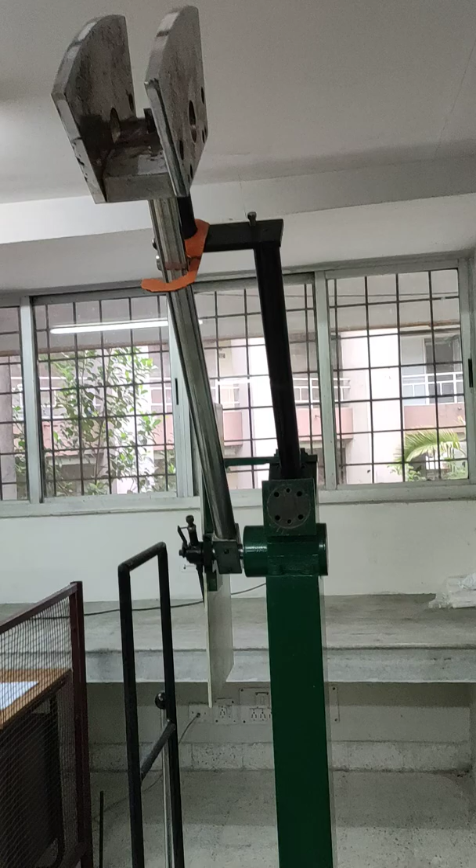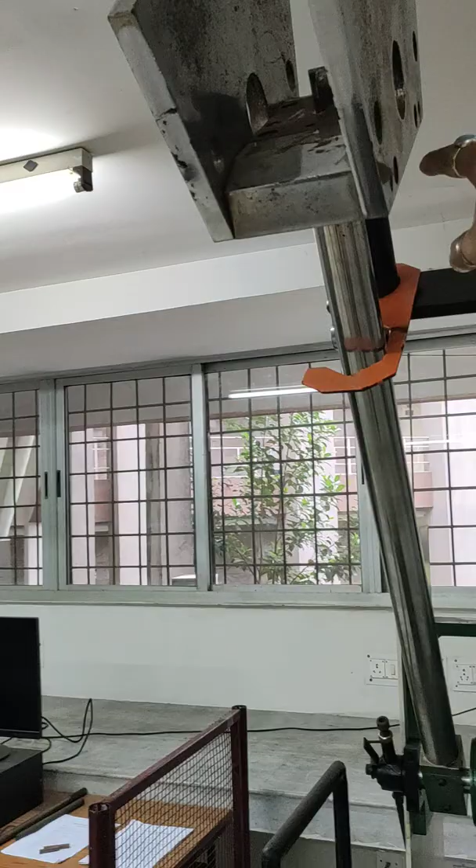So I put this hammer in the topmost position by lifting it, and once I put it here, it will automatically keep fixed, and this is the safety handle. Now the hammer is in the topmost position, and this machine is ready for conducting the Charpy impact test.

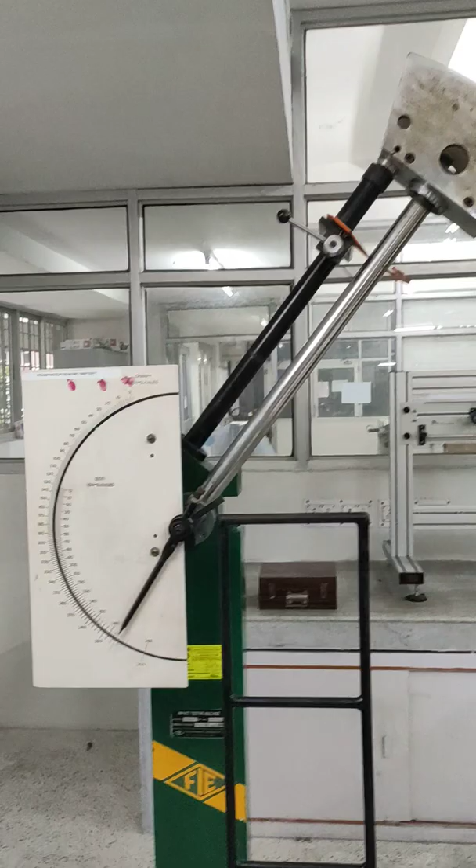So how to perform the Charpy impact test? This is the first step. Second step, we will put the specimen.

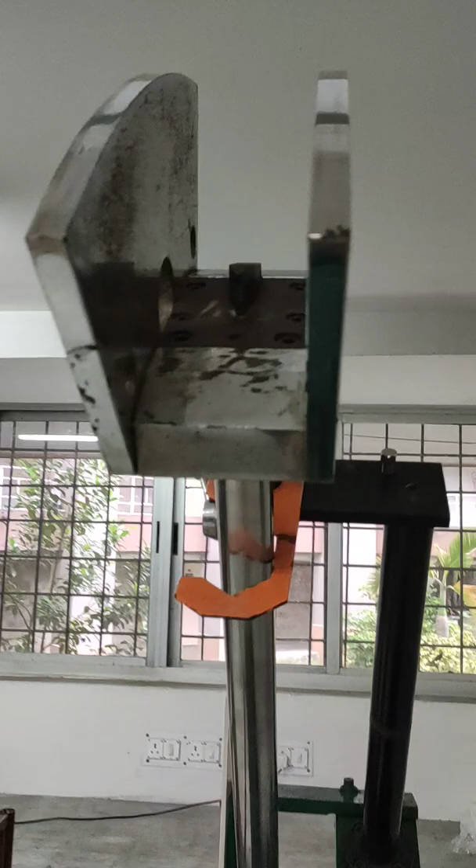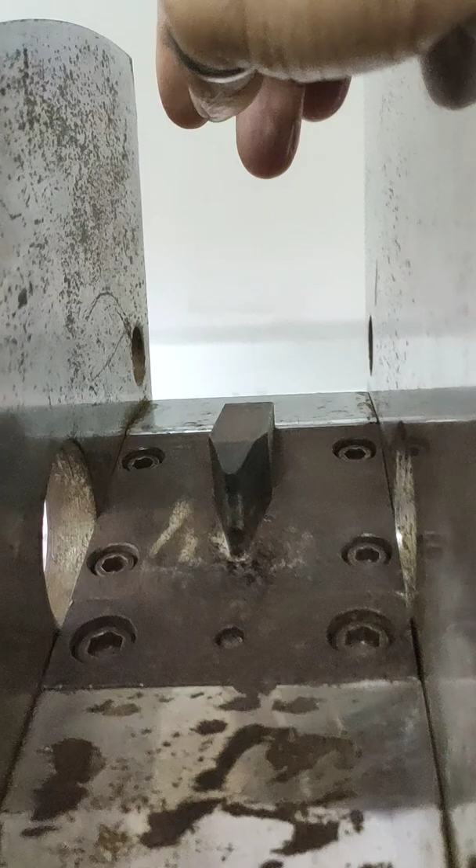Before putting the specimen, you need to see some other things. This is called the striker. It is tapered, and this is the pointed striker, tapered on both sides. The striker can be taken out. For the Charpy impact test, this is the striker used. For the IZOD impact test, the striker will be different, which we will also show you. So in this hammer, this striker is attached.

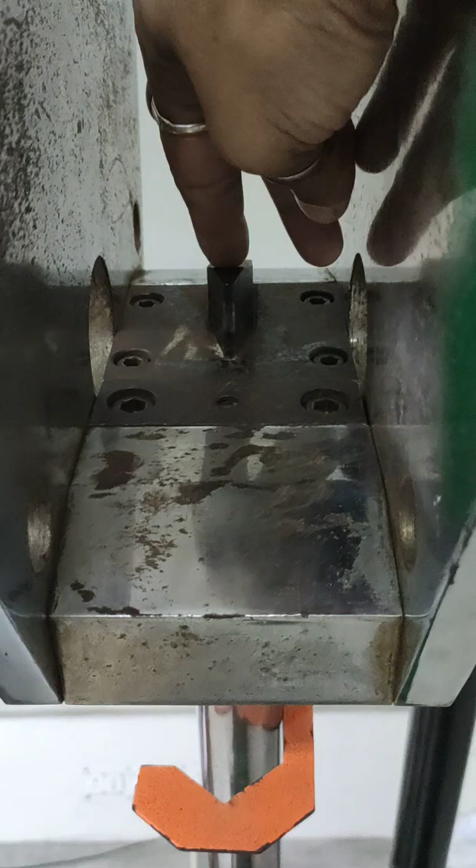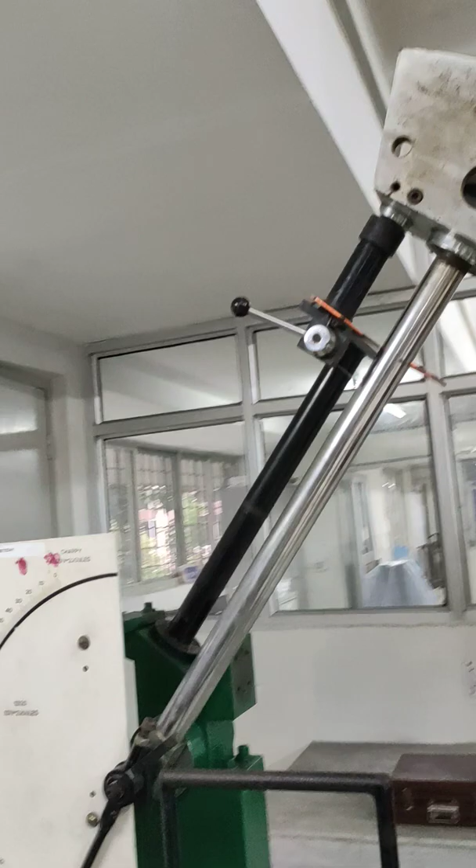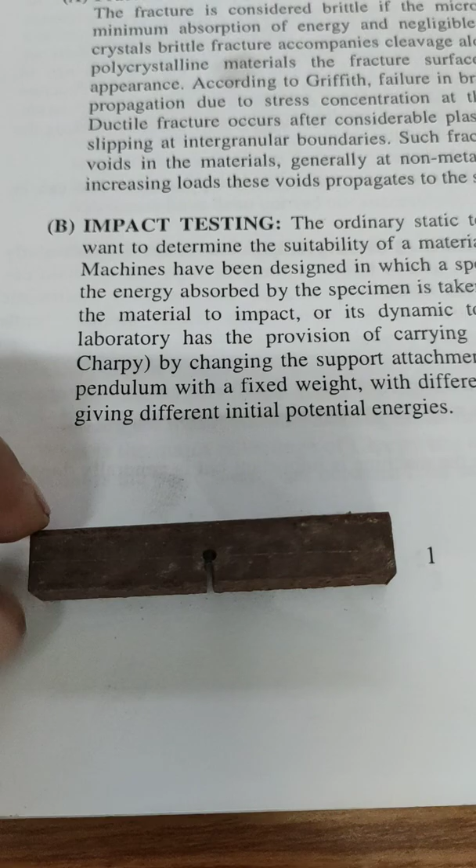Now we can go for fixing the specimen. For fixing the specimen, you need to go to the bottommost position of the setup. So this is your specimen. Just check it once. This is the specimen you have seen. There is some rusting because these specimens were kept since last year.

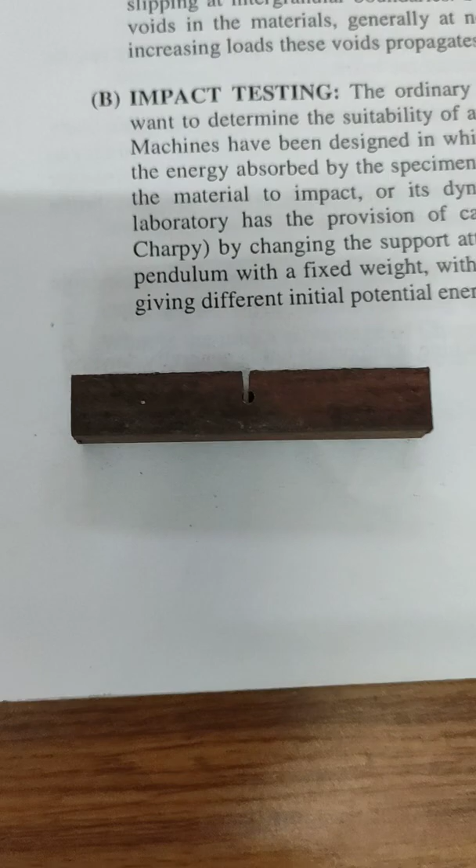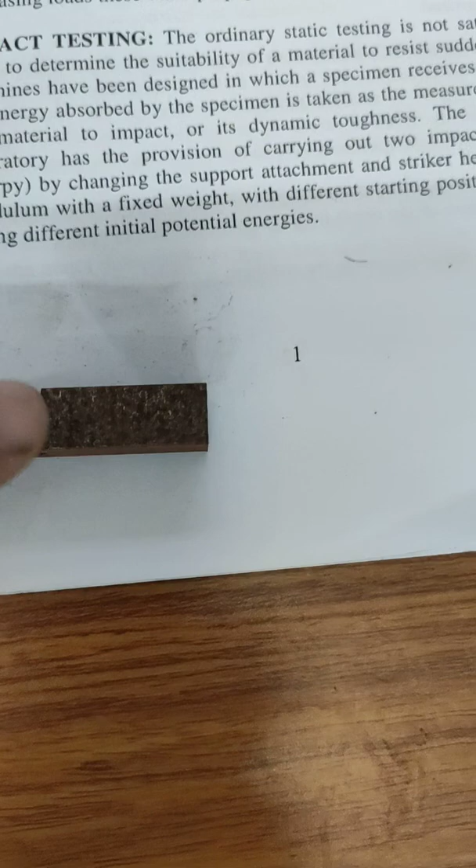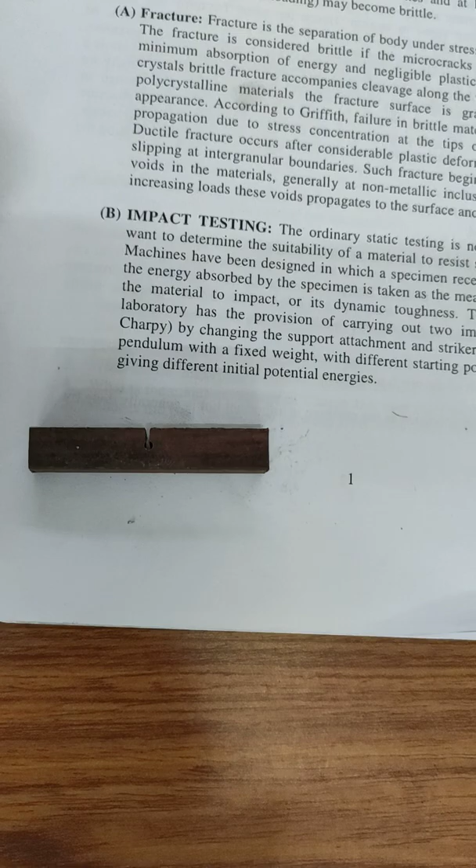So here you have seen, in this specimen, one notch is there, in the center. This is the notch, called the U-shaped notch, or U notch. In both Charpy and IZOD impact tests, there will be a notch on each specimen.

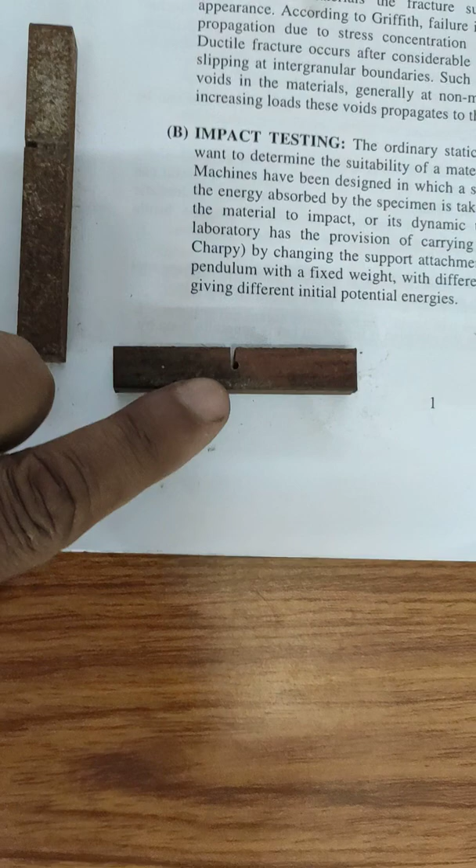For the IZOD specimen, this is the notch. For the Charpy specimen, this is the notch. The notch can be either a U notch or a V notch.

So the notch geometry, where to put the notch, and the specimen geometry are all shown here. This is the specimen geometry.

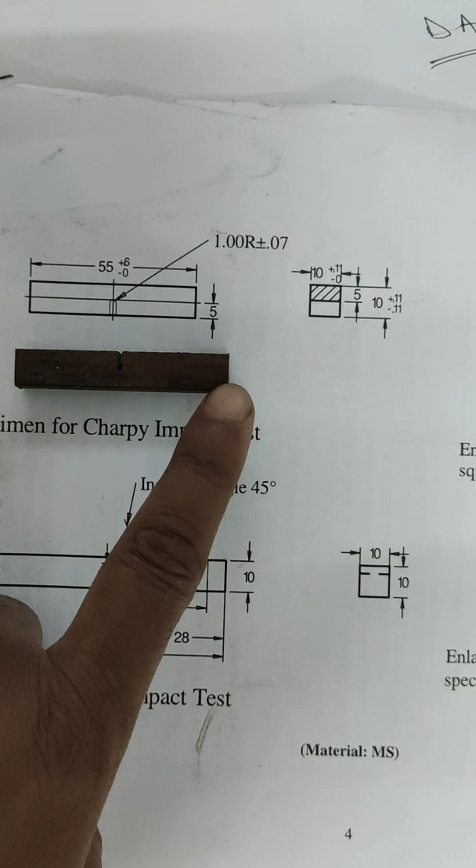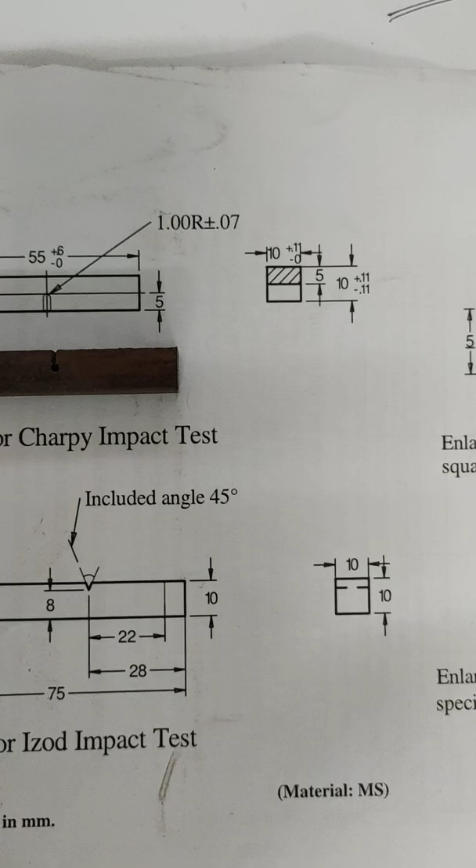For the Charpy specimen, the length is 55 plus or minus 0.6 mm, and the notch geometry has a 1 mm root radius plus or minus 0.07 mm. This notch should be made using a milling cutting machine. The width and thickness of this specimen is 10 mm by 10 mm, with a length of 55 mm, and the notch geometry is as shown.

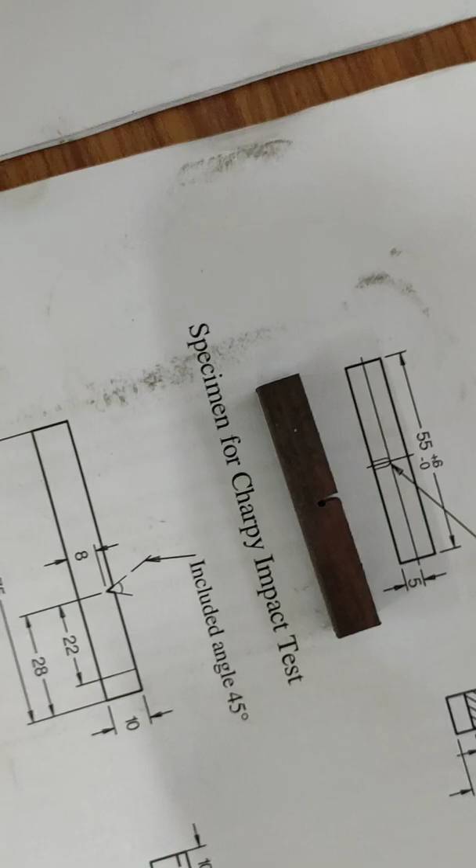This is the notch geometry, clearly mentioned here. This is for the IZOD specimen. This is the specimen, and this shows the specimen dimension details and notch geometry.

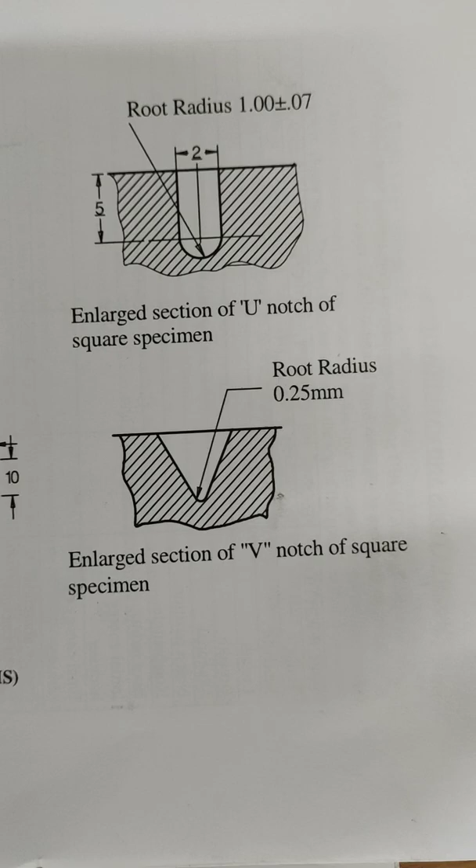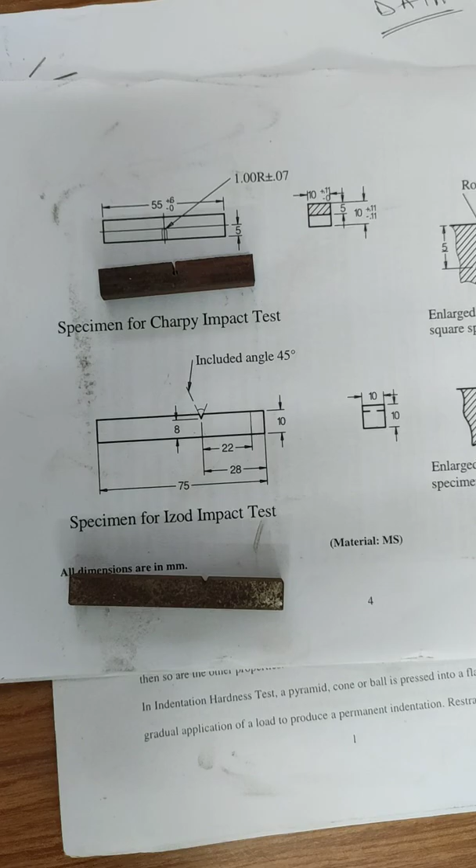The angle is 45 degrees. This is the geometry. The root radius for IZOD is 0.25 mm, and for Charpy it is 1 plus or minus 0.07 mm. Everything will be given to you as a soft copy as well as in video, and we will provide a manual copy so you can easily understand.

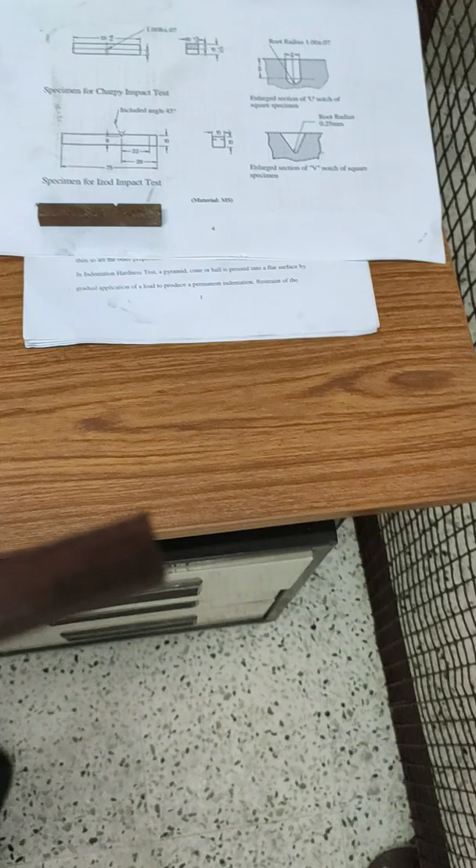Now we will put this specimen on our impact testing machine for the Charpy impact test. First, we will perform the Charpy impact test, as the machine is ready for it.

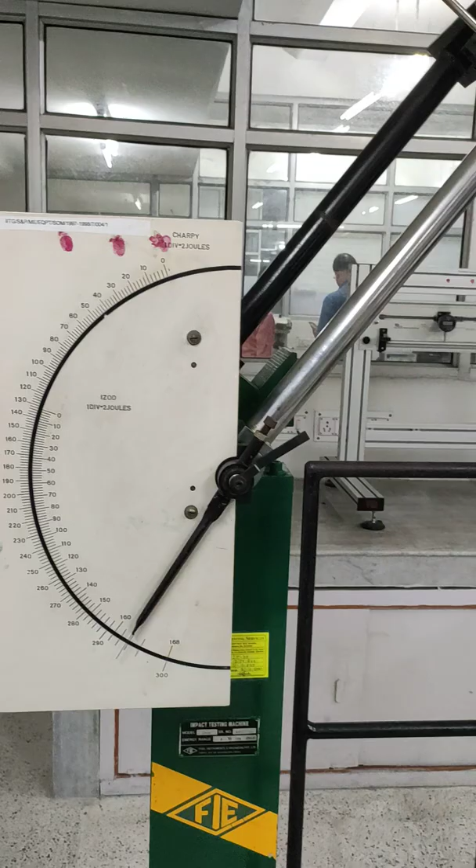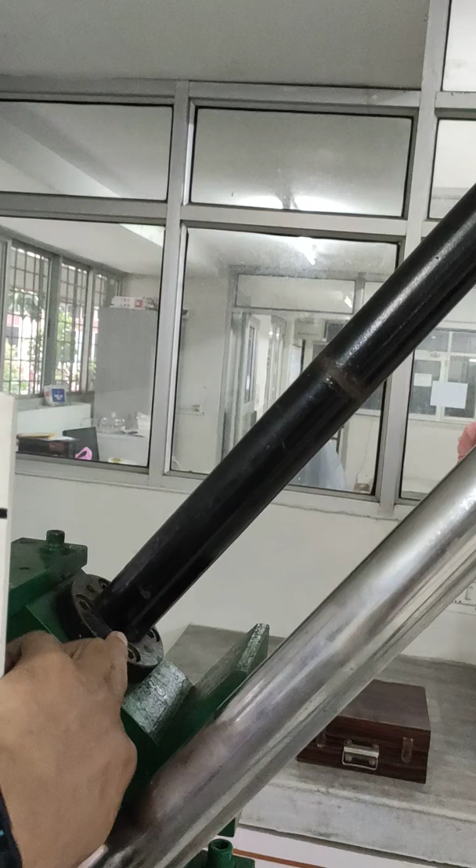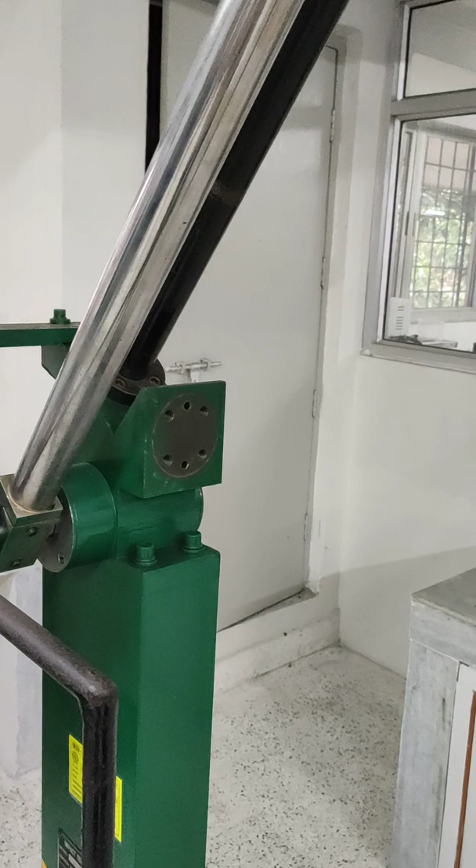For the IZOD impact test, we need to change the hammer position. Right now the hammer position is at 141 degrees, 44 minutes, 14 seconds, as I told earlier. But for IZOD, we need to change this hammer position to almost 90 degrees. For that, we need to put this tube and fix it here, then the hammer will be positioned horizontally instead of angularly. Then we also need to change the striker for IZOD.

As the machine is ready for the Charpy impact test, we will perform the Charpy impact test right now.

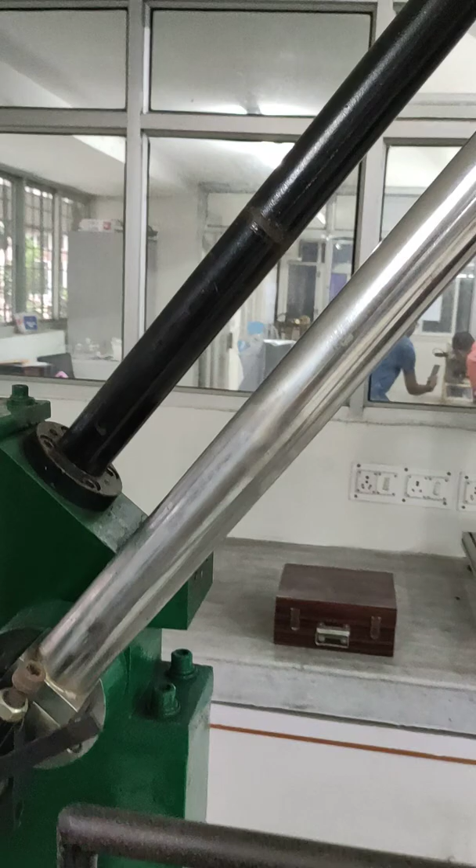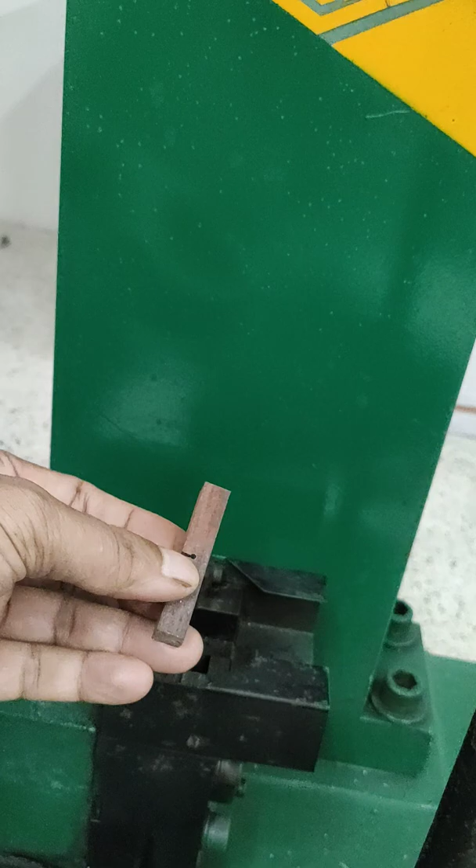How to perform the Charpy impact test I already explained. Now we will go for fixing the specimen. For fixing the specimen, we hold it like this, and the striker will strike exactly at the back of this notch. We put the specimen like this, so the notch is here, facing forward, and the striker will directly strike exactly at the back of this notch.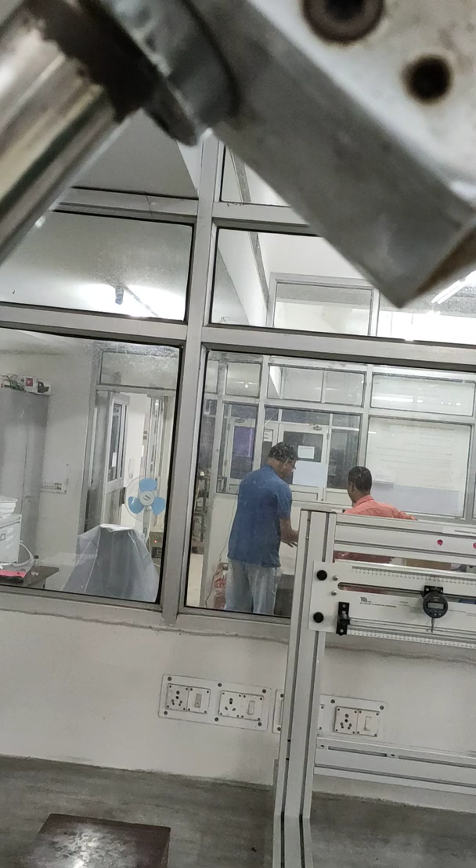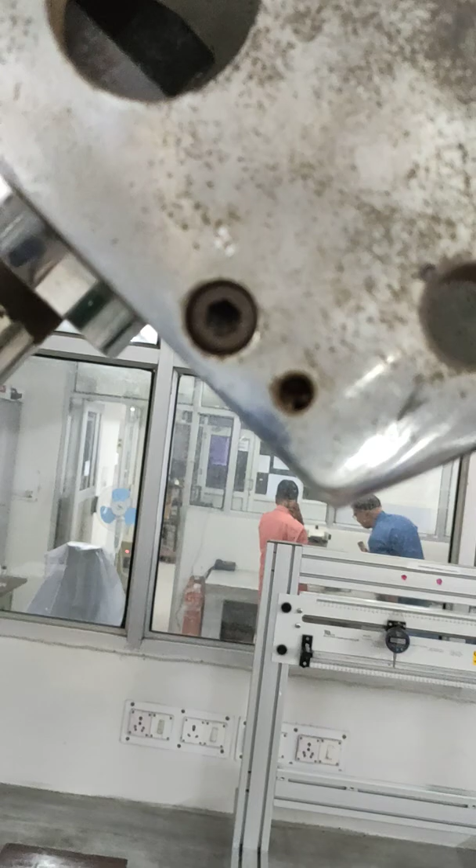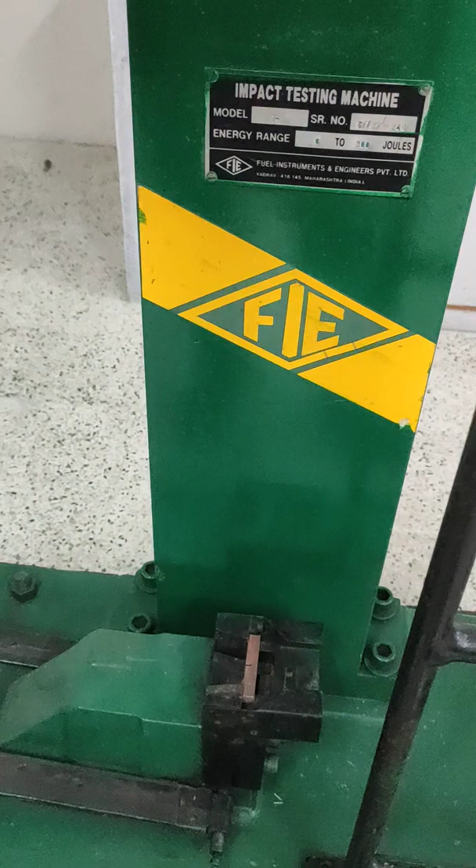Now we will go for releasing the hammer. The weight of the hammer is around 21.5 kg, and we know the height. This hammer has potential energy stored within it, and if we release this hammer, this potential energy will be converted to kinetic energy, which will be used for striking the material. Then we will find out the toughness of the material, how much energy is absorbed while fracturing, while breaking the material.

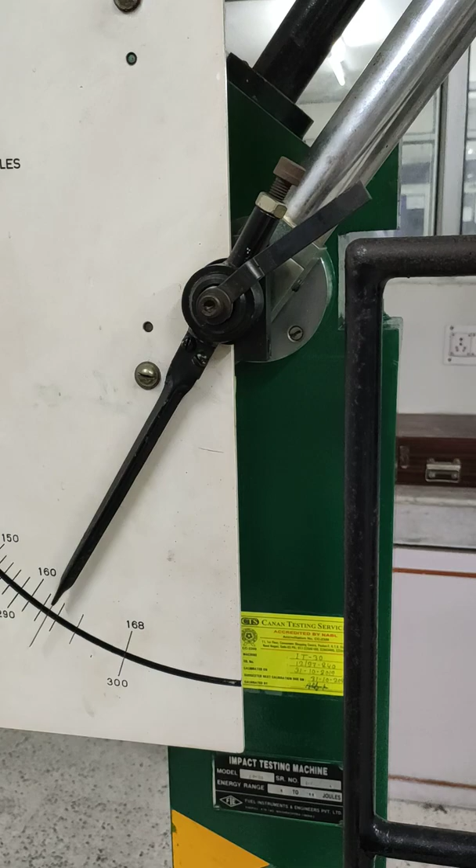Why is a notch provided? So that the specimen breaks through the notch point. Otherwise the specimen may not fracture, it will directly get bent. So you will have some idea once we perform the test how to measure the toughness of the material.

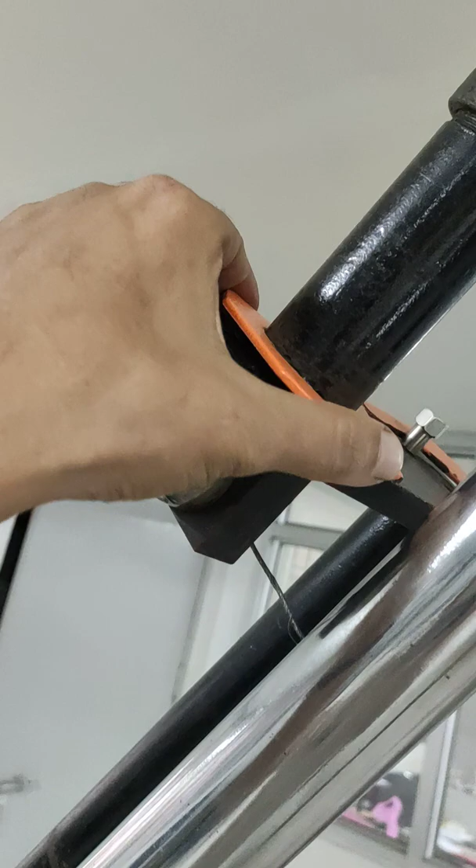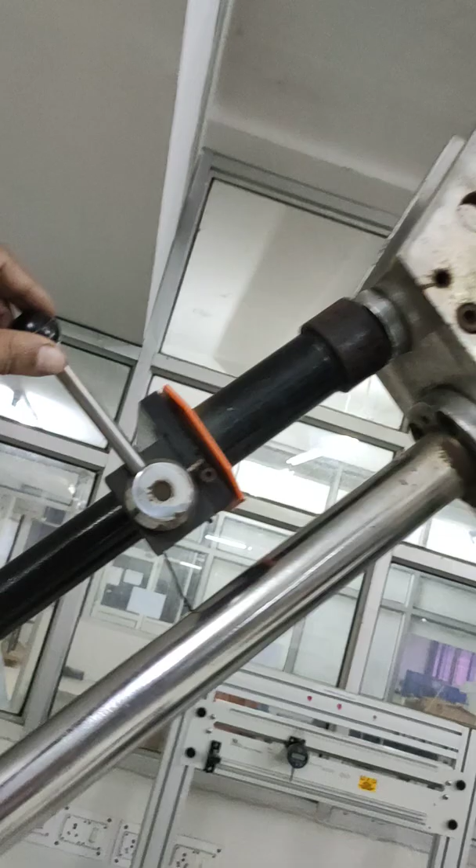Now I am going to release the hammer. For releasing the hammer, you need to place this safety handle in its position. Now the hammer is ready to release. This is the hammer releasing lever. So we will release this lever.

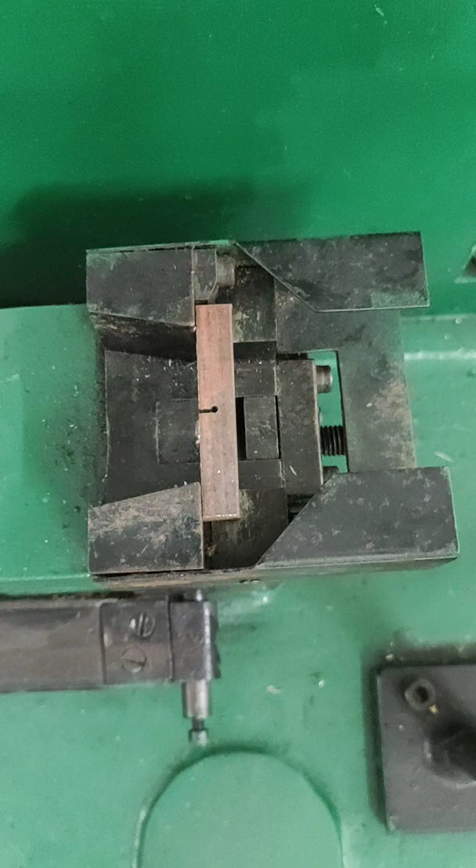Then what will happen? The hammer will fall and swing, and while swinging it will strike the sample exactly at the back of the notch. Then the specimen will get two pieces. If it is ductile material, it may just get fracture or some deformation before failure, and if it is brittle material, then it will become two pieces.

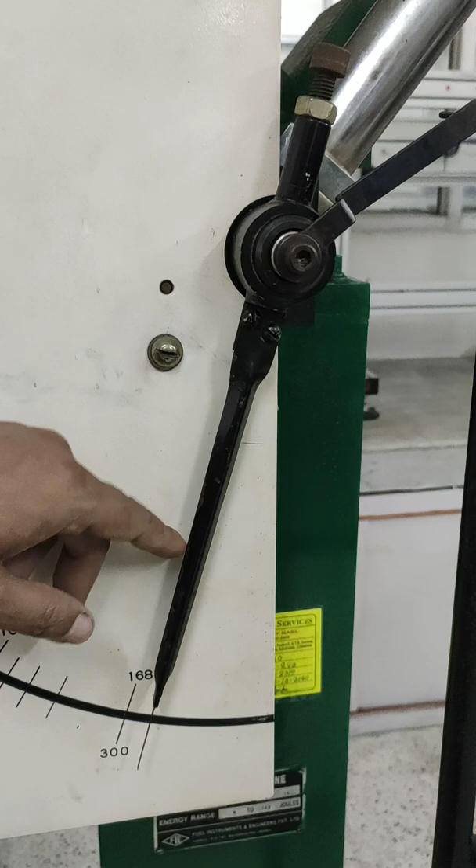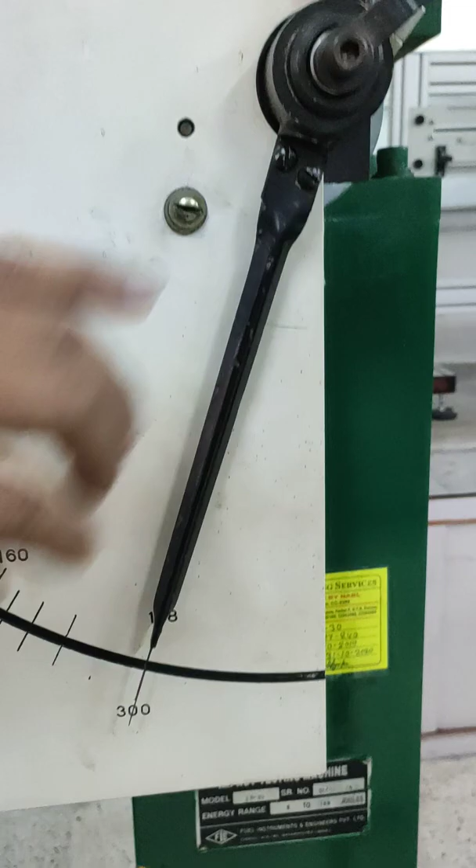Now I will place this pointer here. Okay, now I will release the hammer. I am going to release the hammer.

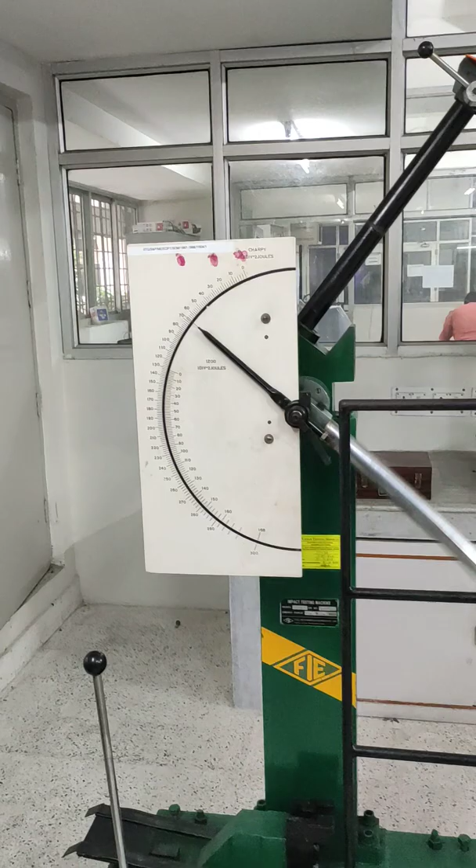Once I release the hammer, it swings and strikes the material, and the specimen gets failed. The specimen becomes two parts through the notch.

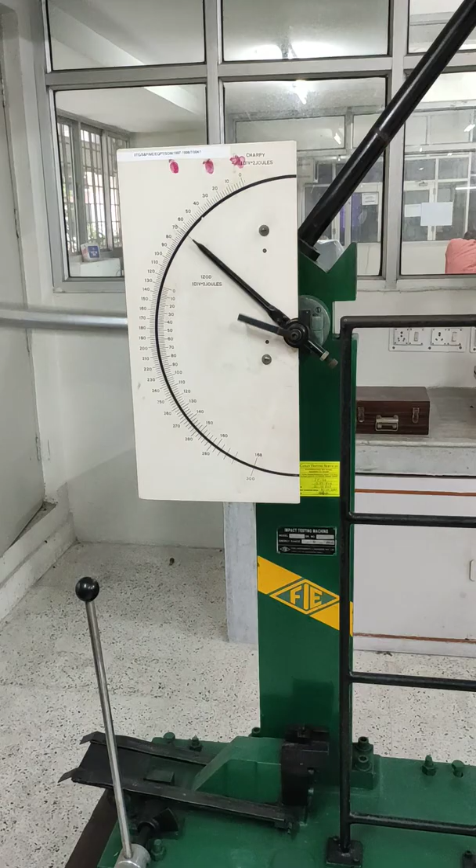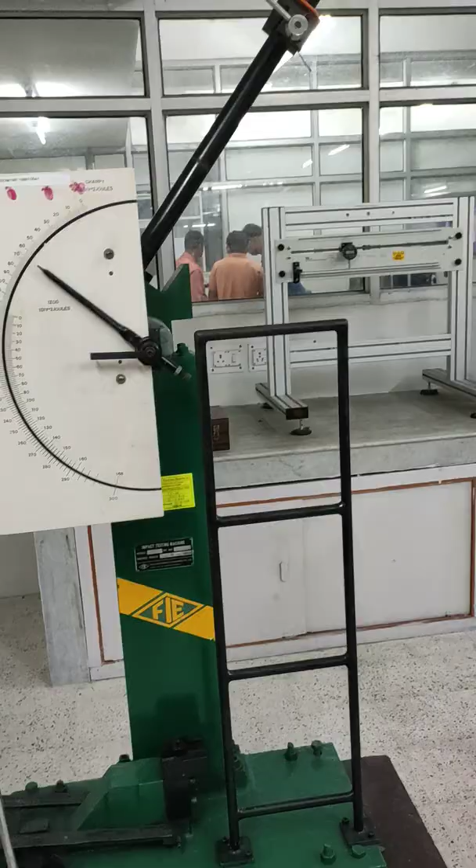Now we need to stop the hammer, as it is swinging. As this experiment is a little bit dangerous, protective barricades are given. So now we will put this brake, this brake we will use.

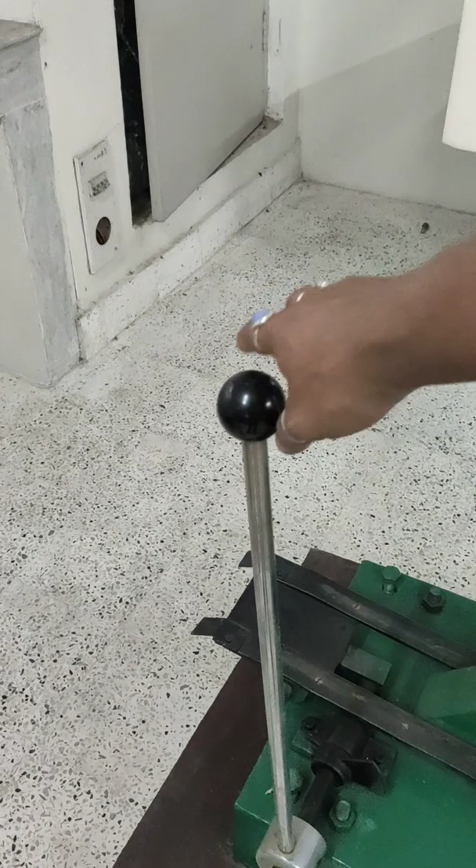Then the hammer will be stopped. So the hammer is stopped now. Now we will measure how much energy it absorbed while fracturing the material.

You count from 0, with 1 division equal to 2 joules. This is 2 joules, 4, 6, 8, 10 joules. This one is 10 joules, and here it is directly readable. This is 60 joules, 62, 64, 66 joules. Almost 66 joules of energy was absorbed by this material.

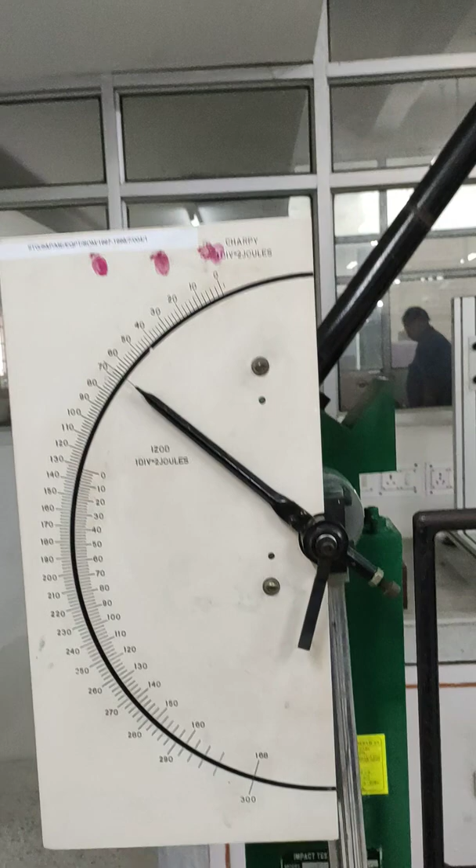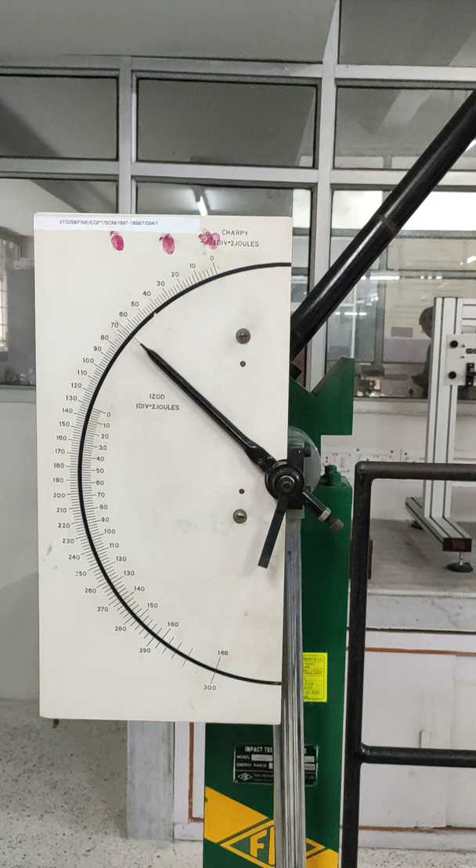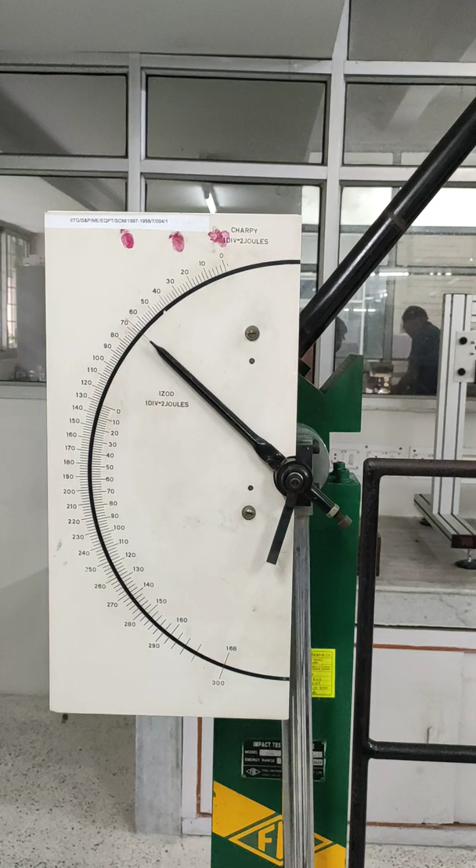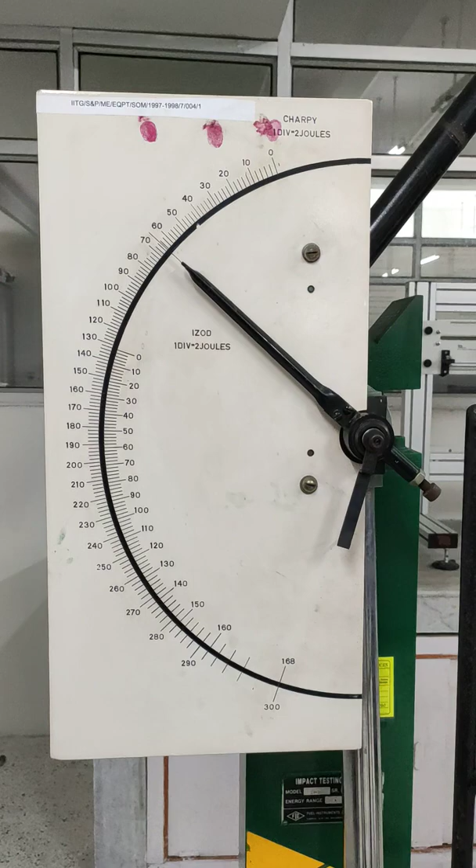This is how we need to perform the Charpy impact test, under different conditions like temperature and weather, including cold conditions. If we keep the material at low temperature, below a certain degree Celsius, what will happen to the toughness? Will the material change or not? At high temperature it may take less load, and at low temperature it may take more load. So at different conditions we can perform the test. This test was performed at normal room temperature, but this machine doesn't have a specific environment temperature chamber, so we have to perform it at normal room temperature only.